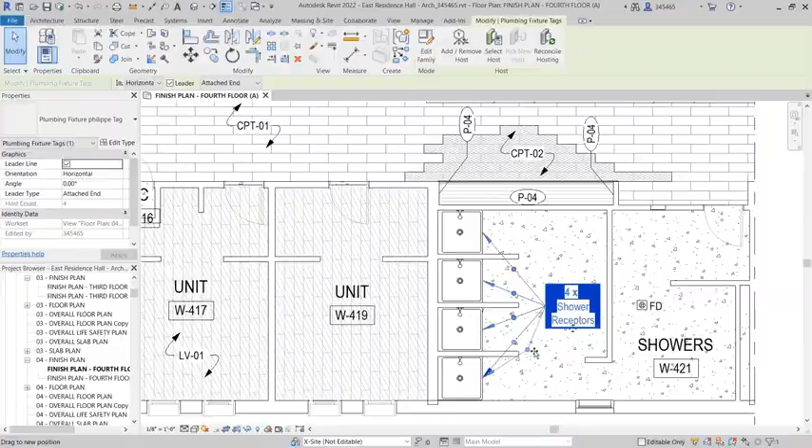In Revit 2022, you can choose to display grid lines in your 3D views. Go to the Show Grids parameter in the Properties palette to access a list of levels for your project. Select the levels for which you want grid lines to display.

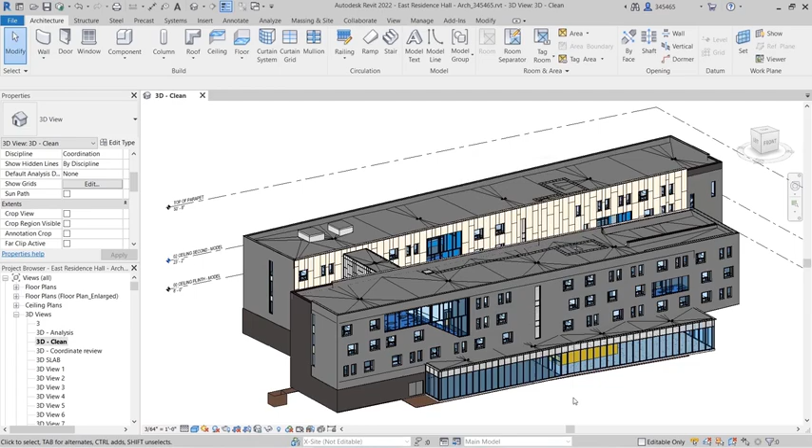This setting applies to all grids in your project, but only the grids that intersect the selected levels will appear in this view. Grid planes are available on hover and selection, making it easier to locate them in your model.

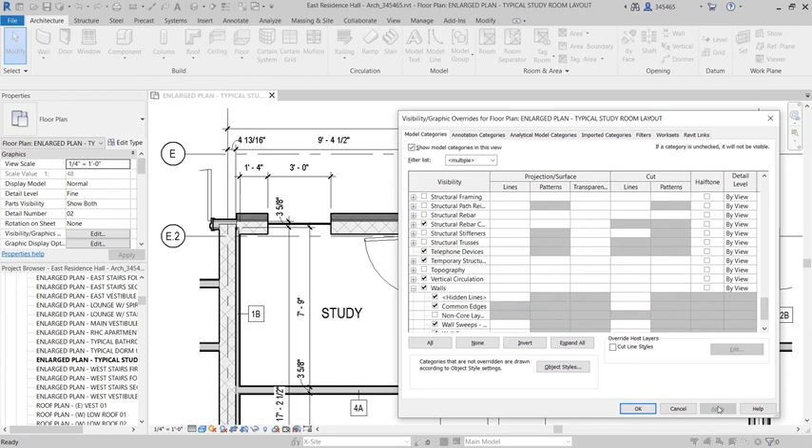Revit 2022 introduces a new parameter to display only the core layers for walls quickly and easily. In the Visibility Graphics dialog box, deselect the new Non-Core Layers option available under Walls to display a simplified representation of walls in your 2D views.

When you rotate a tag in Revit, you might like to control the angle value precisely. A new angle parameter for tags found in the Properties palette makes it easier to control the display angle of a rotated tag. If you rotate the tag with the Rotate command, the angle value is automatically calculated,

but you can enter a specific value afterwards if you like. This feature is easy to apply to tags in your views, giving you better control over your project documentation.

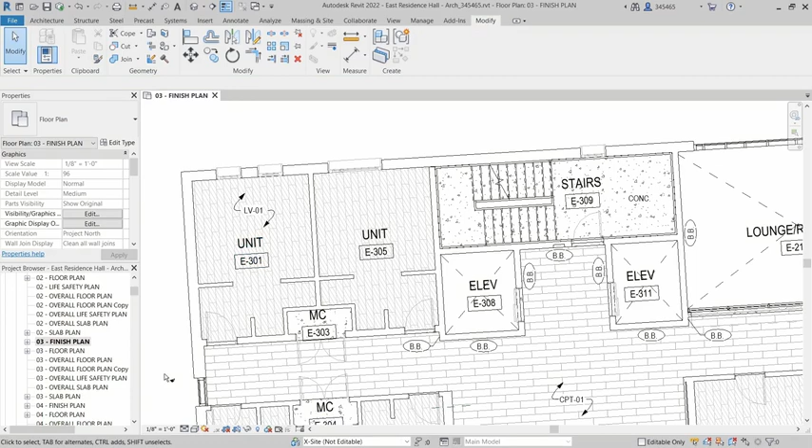If a view in your project contains similar elements, you may prefer to tag them as a group. In Revit 2022, you may now apply a single tag to multiple elements and even indicate the total quantity, if desired. Simply select a tag and open it for editing by clicking the Edit Family button.

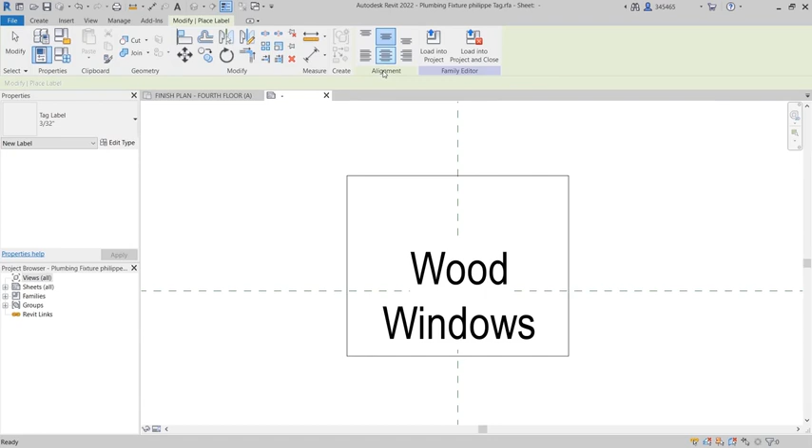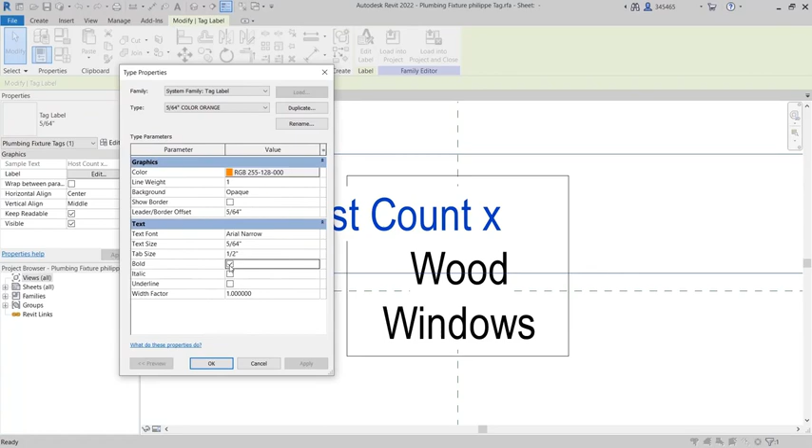Here, you can modify the tag behavior by editing the label and adding the new host count parameter found within the multi-leader tag category. You can enter a suffix such as X for multiply and customize its appearance. In this example, the text will display in an orange color and bold font on the documentation. When everything is configured as desired, you can load the modified family back into your project.

Once a tag has been placed in the model, you can add or remove leaders to similar host elements at any time by selecting the tag and using the Add/Remove Host option on the Contextual tab of the ribbon. When you do this, the quantity of host elements is automatically tracked and displayed both in the tag itself and

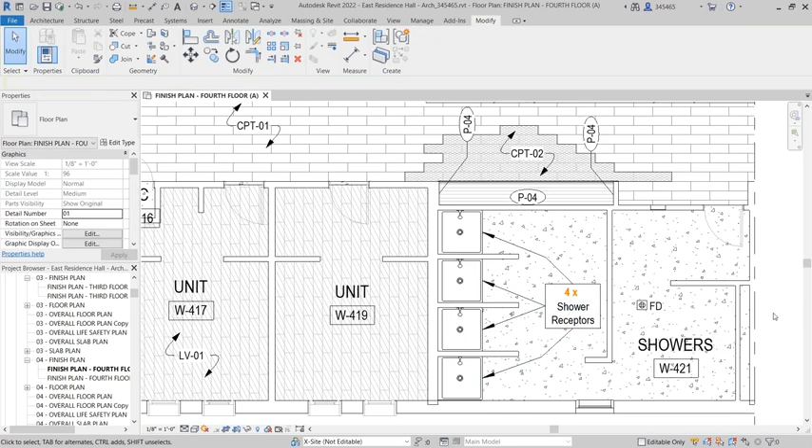in the Properties palette. You also have access to specific snap points to modify the leader lines according to your preferences. The addition of multi-leader tags to Revit 2022 will help you create more accurate, readable, and efficient annotations when documenting your projects.